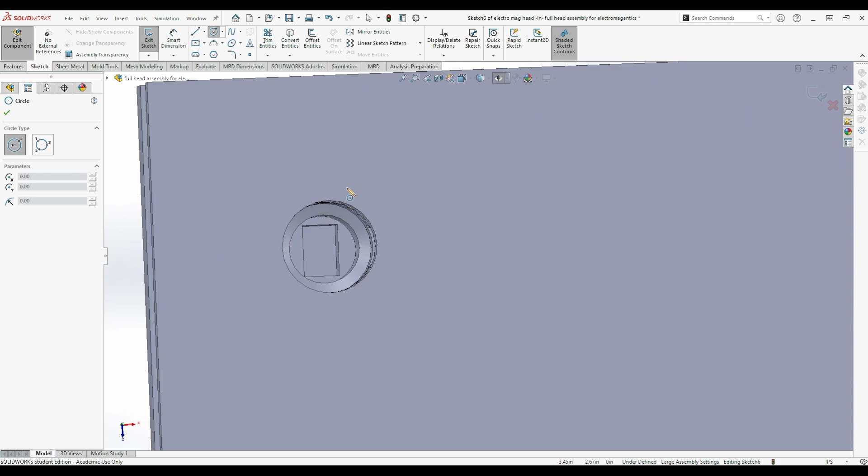So you're probably wondering, what in tarnation is this? Well, I'll tell you. This is possibly one of the coolest things I've designed so far. This is a 3D pin toy turned into a tool. This tool specifically is best for weighing things, modeling things, and also taking measurements.

So I'll give you a little backstory. First off, my video on Monday, I designed this. This is the main computer housing of this whole two-part series product, and so this contains all of the housing.

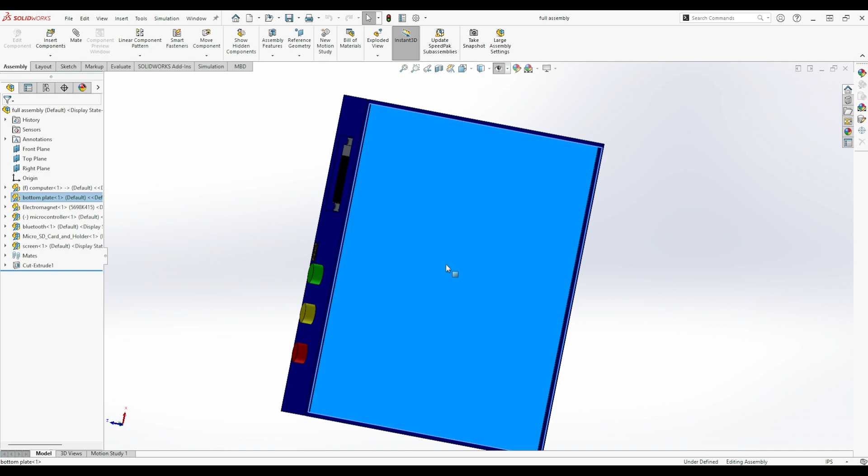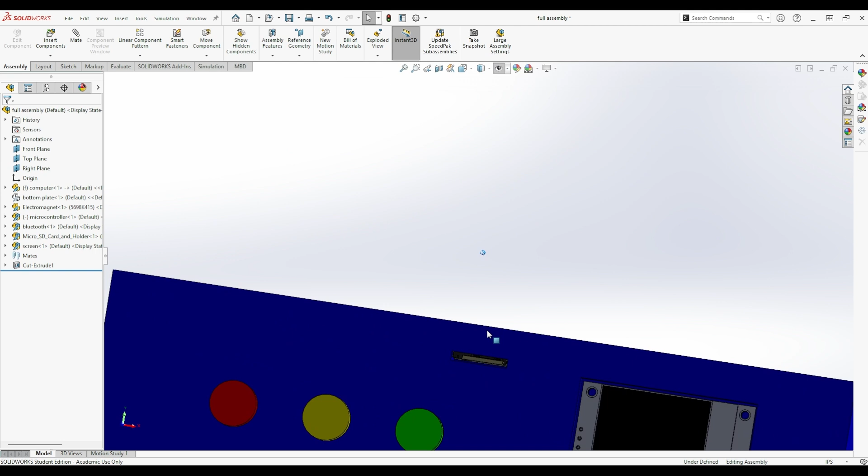So it has an electromagnet, it has this main microcontroller circuit thing that connects to computers. Here's Bluetooth, so you can download the app and connect to it. Here's a micro SD card, so you can add storage to it. Buttons for modes, resetting, and turning it on and off, and then a little screen to tell you the weight and all the extra little things you need to know. So that's what I modeled and showed on Monday.

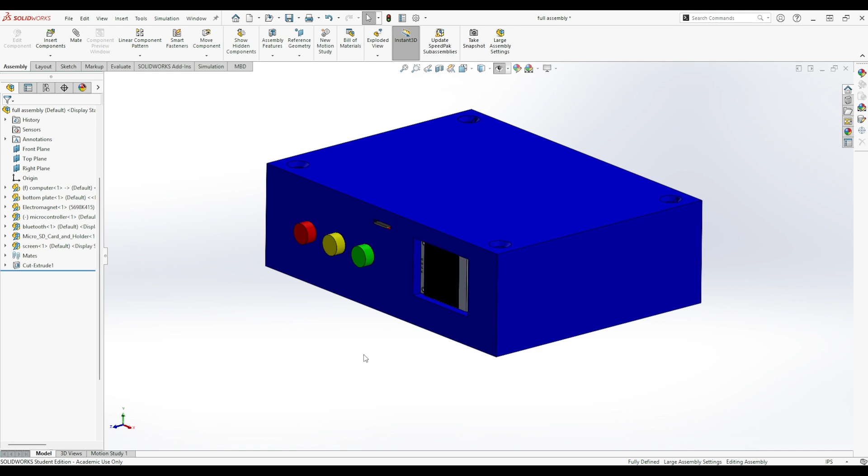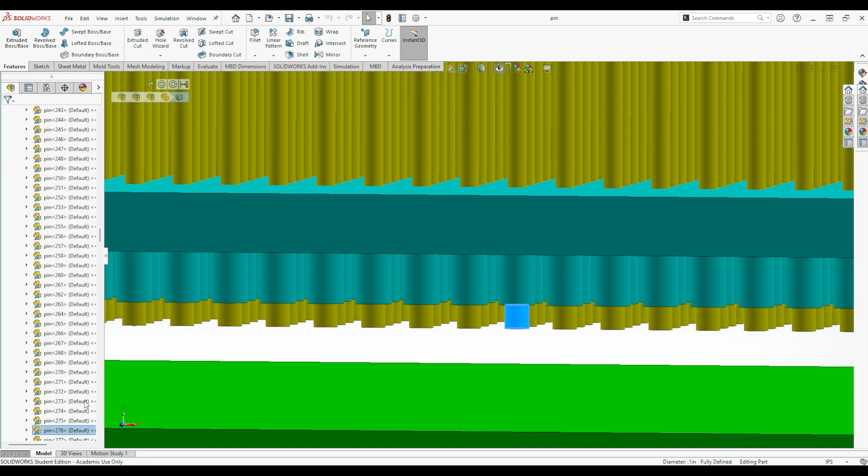And then this week I have two heads that go on top of this that are pretty sweet. So this one, all these pins - imagine with me, okay. These pins will actually open up, one of them. Yeah, if you couldn't tell, there's a lot of pins. If you see over here, there's about 759 pins in there, so that's why it takes a bit.

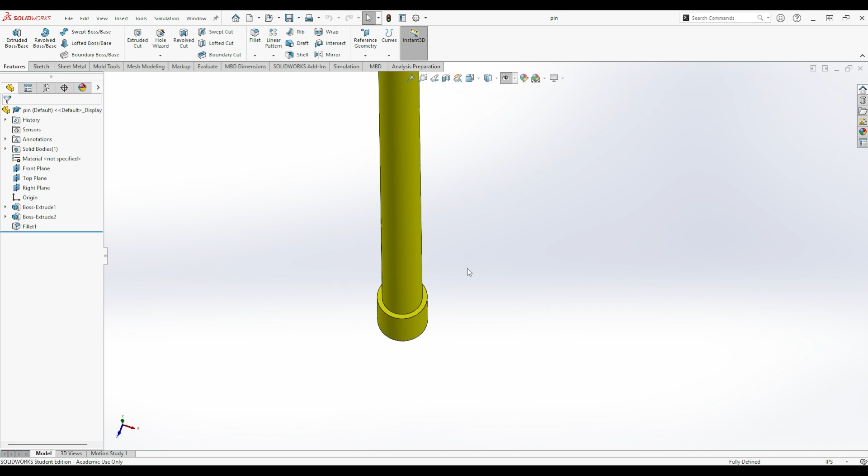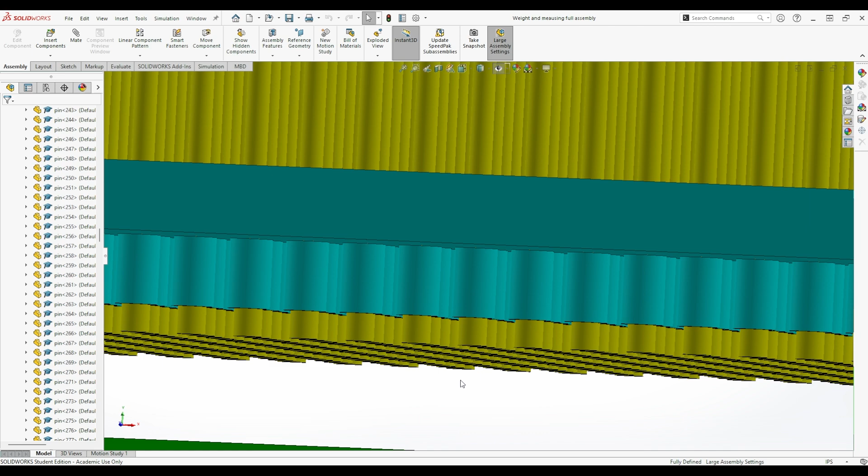So here's the pin, here's a little lip. I want this lip to have a little magnet slash circuit in it that would connect to the bottom of this. So these overlap so they can't go any higher. But since this detects weight and measurements, if these two work together, the farther these move down, the more you know how deep it is. So if you put something on it, it'd be able to tell the weight of how far it goes down and the distance.

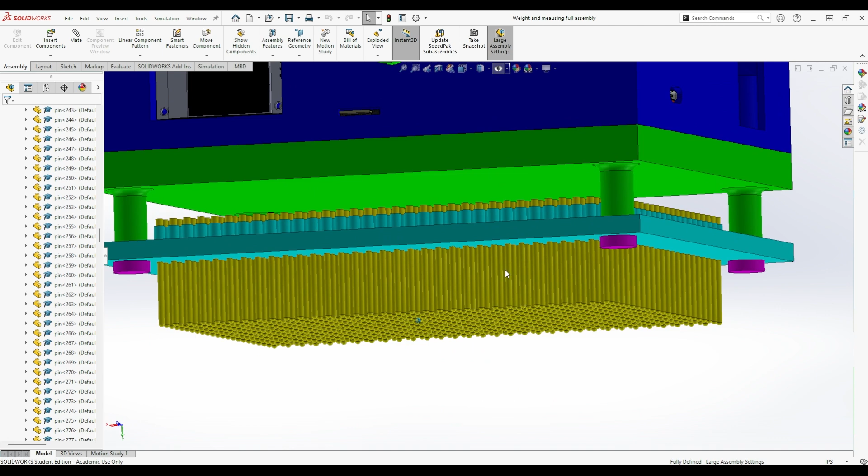The other problem I kind of found was like, if you're gonna measure something sitting it on top, it might not work as well. So you might have to flip it over and put it on it, which, since everything's locked in, should be okay. Which is kind of cool. But then you could put it on it and it will kind of move up, and that will help determine what it is.

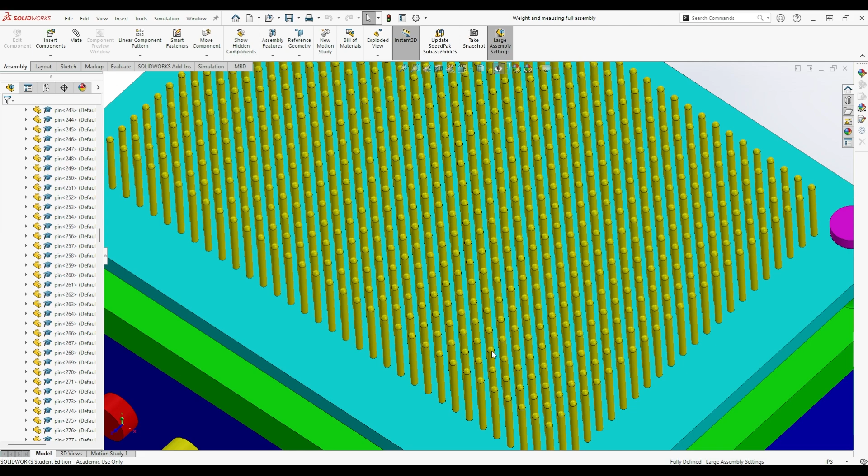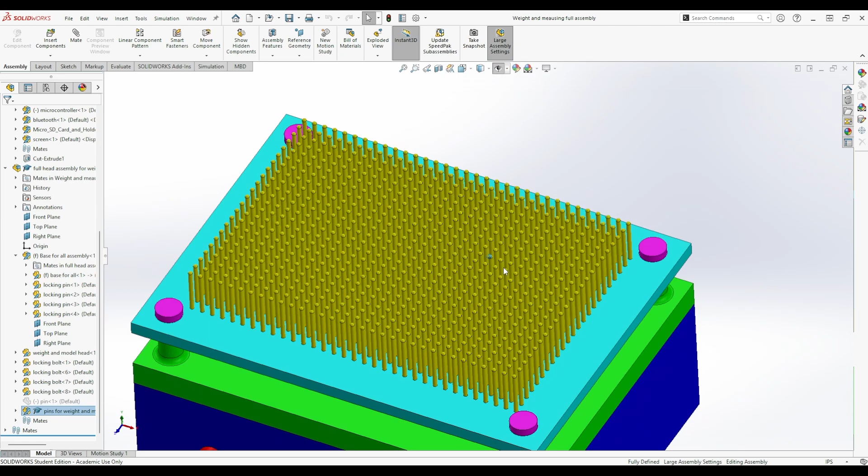And then the modeling part is, theoretically it would be a lot tinier pins and a lot more of them, because the more pins you have, the more you can tell how much is there, how much isn't there, and you can get the dimensions a little closer. For this, let's scroll down and see how many pins I got - 759 pins. I didn't want to model any more pins and figure that out, so we're stuck with 759. But you get past the number and you understand what's going on.

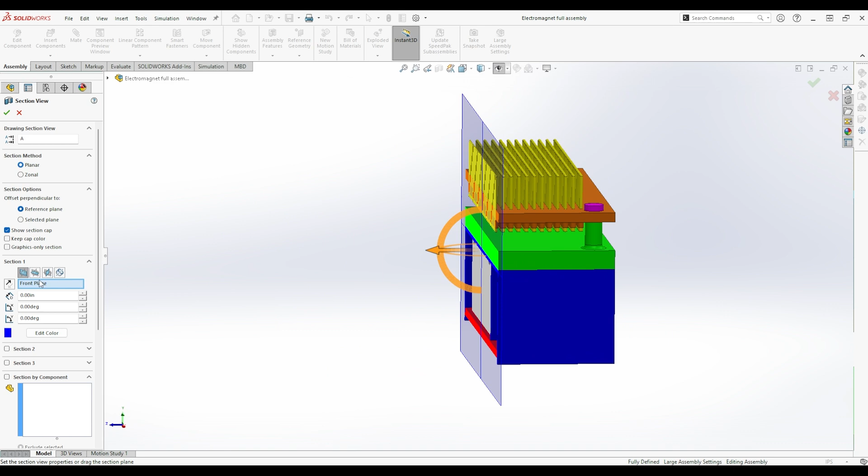And so there's two different types of heads. So this one's one, and then here is the other one. So, oh, nope, wrong one - here you go. So this is the electromagnet head. And so we'll actually go to this. Now if we take here, so you can see, sorry, it's in line with the electromagnet.

So as this is pushing up, you'd mainly hold it like this, and this would be to pin things down. So you can pin it down, turn on the electromagnet, and it would push those down, and it would hold it there, so it wouldn't move around.

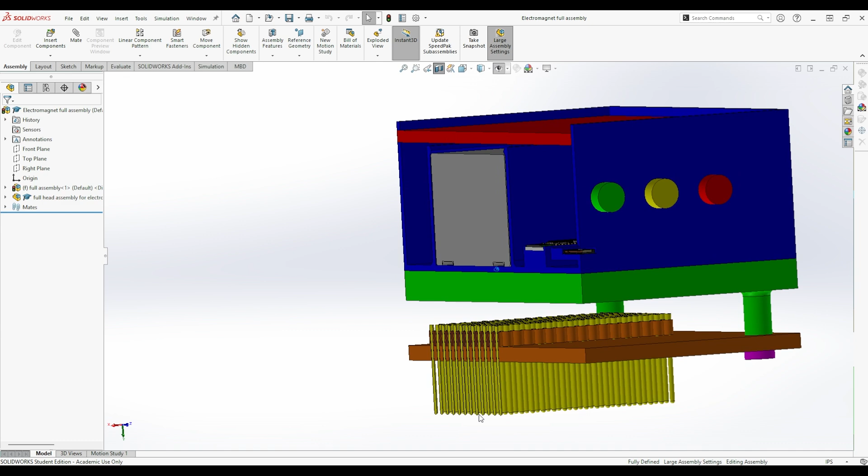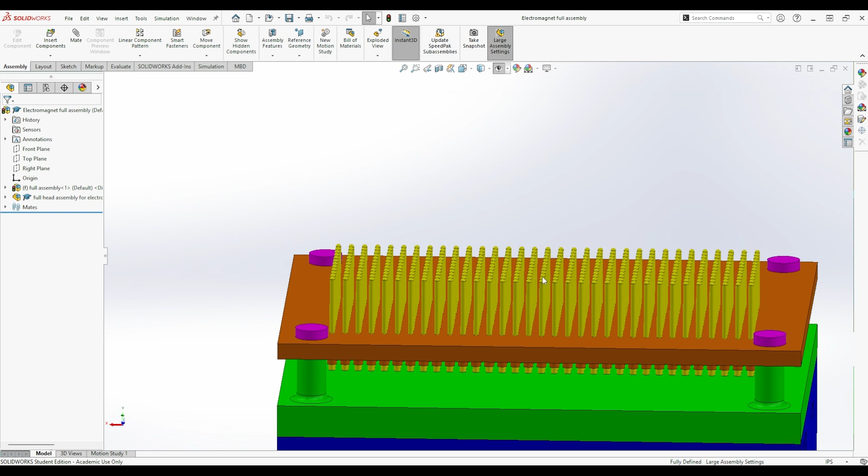Another way you can use it is if you sit something on top and you let it push it down, then you can kind of work with it, because some of it's going to be pushed down, some of it isn't. And then when you turn the electromagnet on, it will push these up, allowing you to push against it and then you get a better hold because these aren't going side to side - they're only going up and down. So you can use them as kind of like a wall to lean it against.

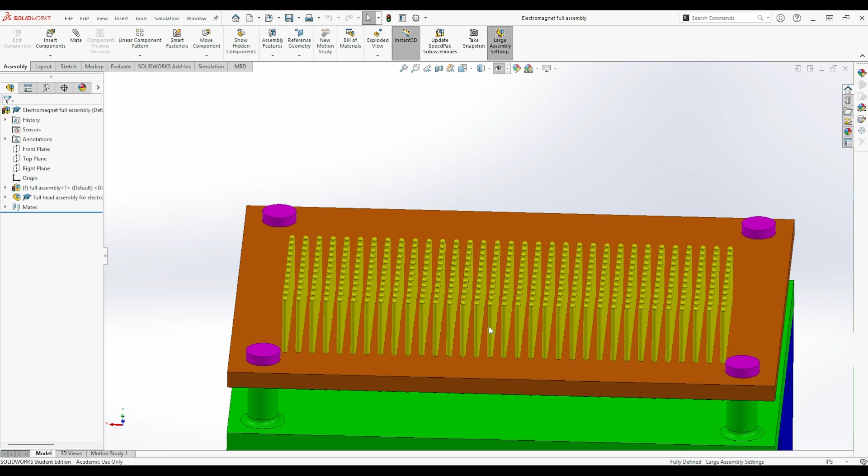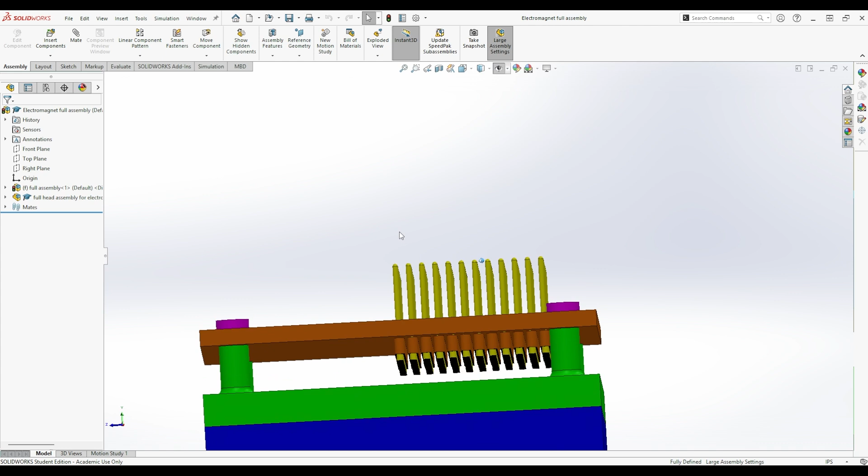And then it allows for if you're working on small parts, a smaller wall so it's not in your way, and you can mess with it. So if you need, you can go on this edge, put them in between, and then mess with it. So that's kind of the cool part about it. And so this one's only on the back because that's where the electromagnet is. Yes, the electromagnet could work along through this and push them up, but for the instance of showing, having it right in line straight up pushes all those up. So that's the best way to show it.

And then we have this base. Oh, my bad, so we'll go here and show this. And so this is the cool part.

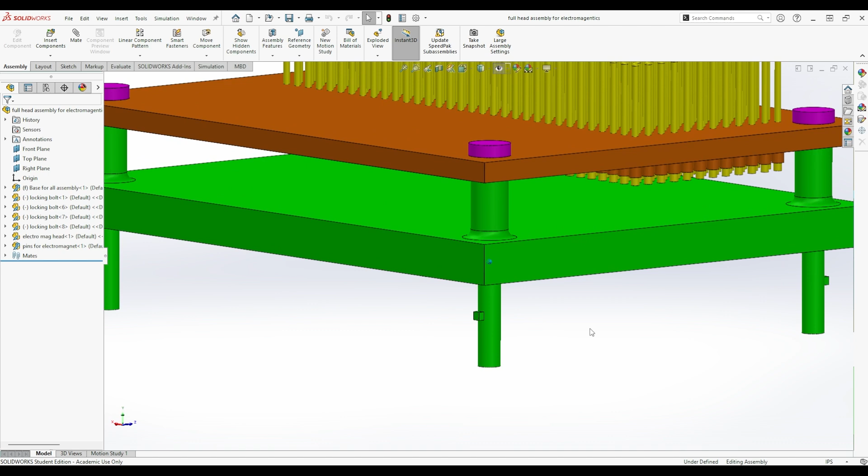Actually, we're going to go back. Screw it, we'll leave it. There's a fly in my room and it's really annoying me.

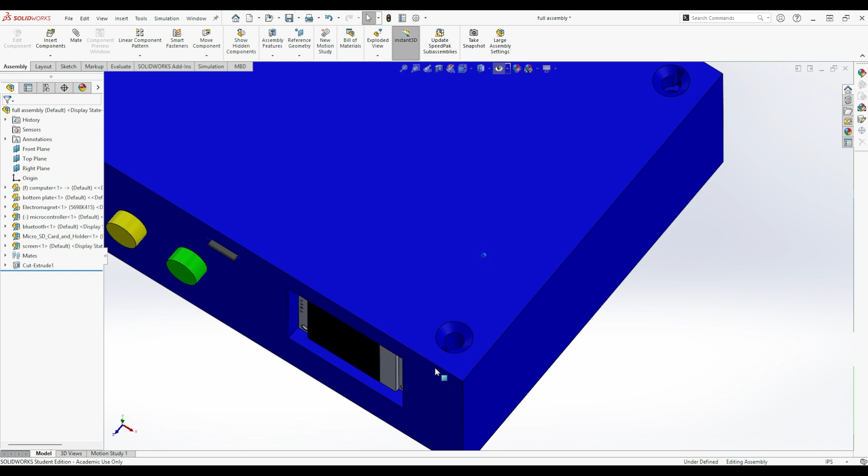So you see these little tabs right here. If you go back to this, it also has tabs. Those tabs go in and spin, and then they lock it, so now it doesn't go out. This is how the information gets from the pins to here, through this board, which is an electrical board that has the information you need that comes through here, goes into here, and goes down, and that's how the circuit and the computer knows what's going on.

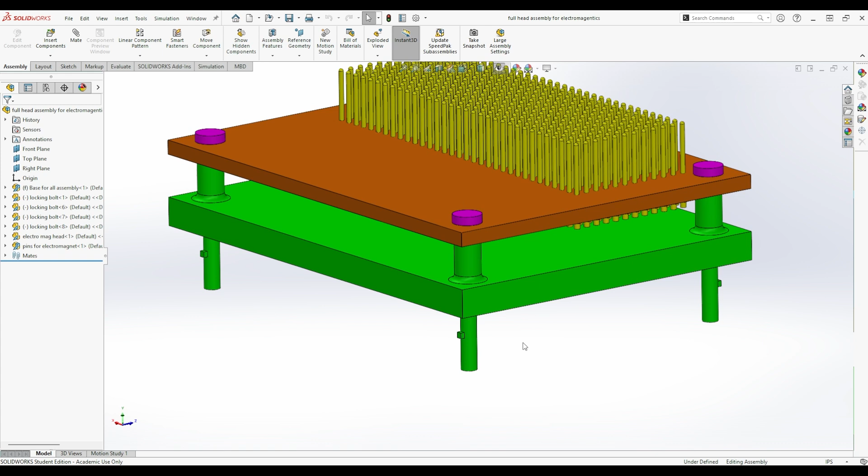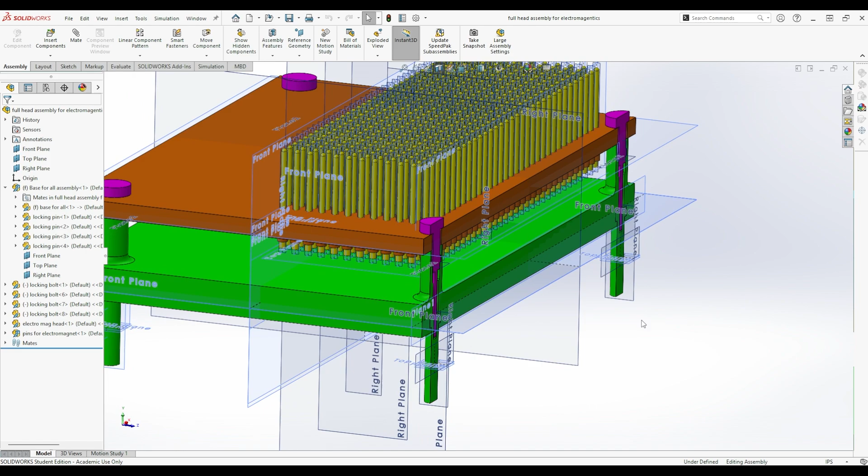Now the next cool part about this is we have to turn this on, turn that off. Where'd it go? Okay, we'll go here. And then here. Here. So what I did is kind of a genius move.

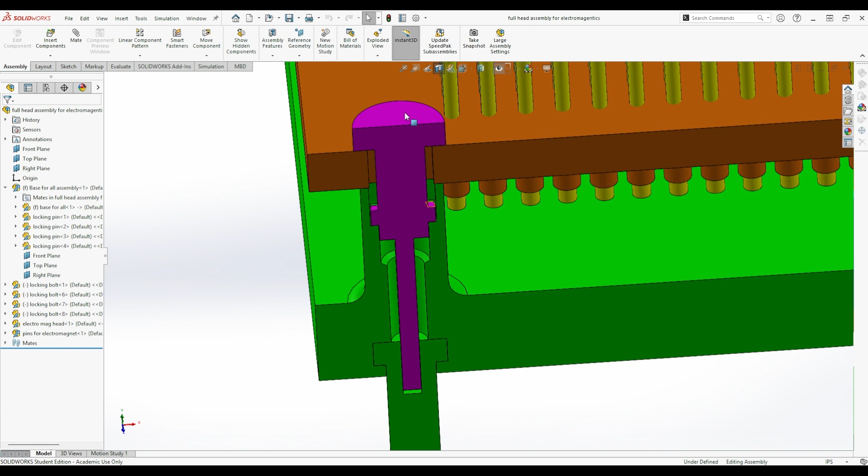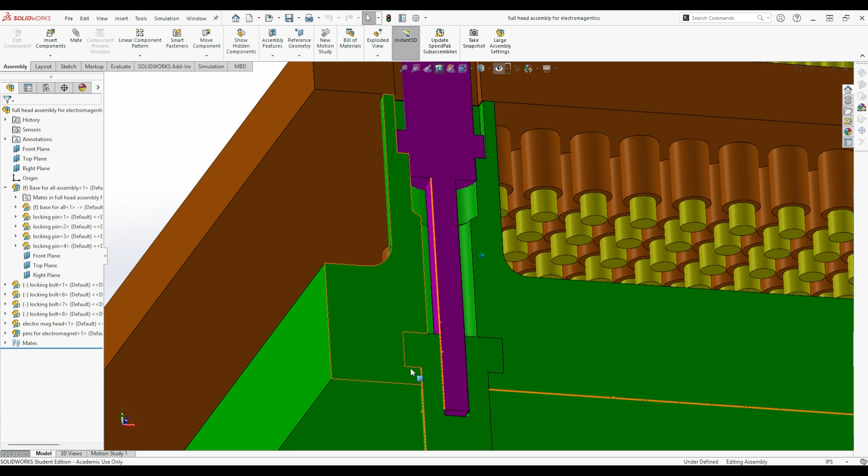So this pin would be made out of a metal of some sort, don't exactly know, but through this, the top plate is a little slider for the pin, and these pins go in and it allows you to slide it around. There's a little channel through there that you can slide and lock it in, but then also this pin has this other extension that goes down through, and this pin's inside the other base, and it slides into that where this pin is. So when you spin this top one, this spins as well, locking it all into place. So this panel locks into this base, and this base locks into the computer itself, all with one turn.

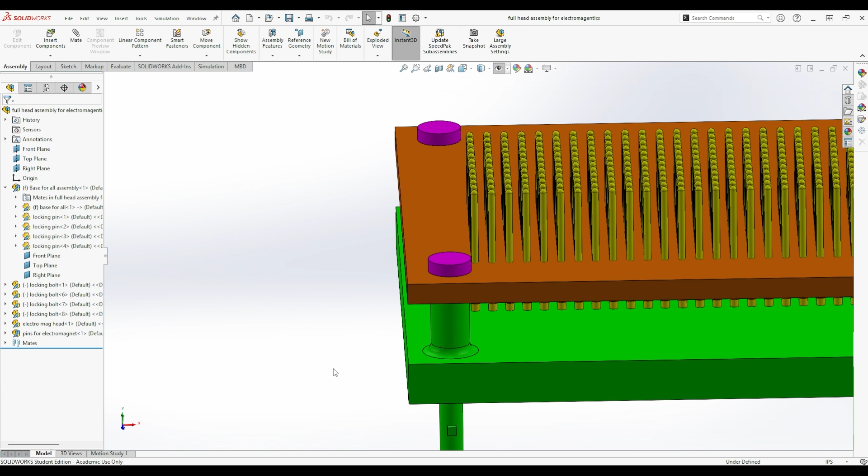Yes, I know it's not extremely strong, but you have 4 pins on it going different ways. These 2 are going one way, these 2 are going a different way. They don't need to be super tight because you still get the same results. This is where the money is. These are just to hold it into place, but also allow for easy changeability.

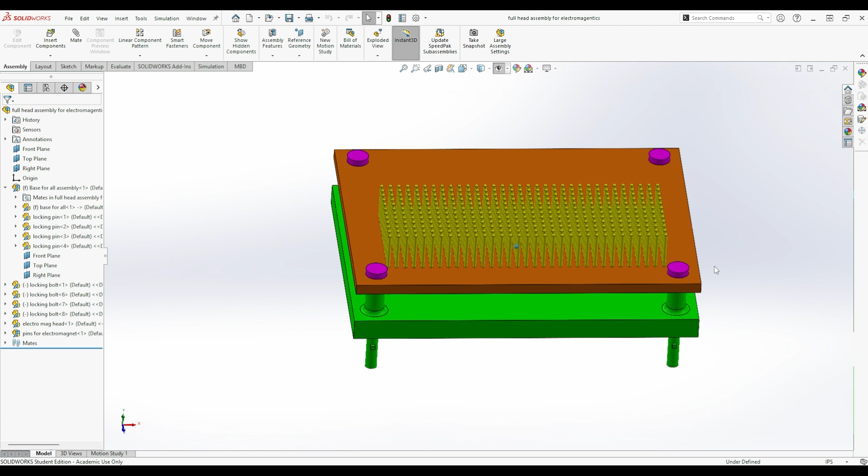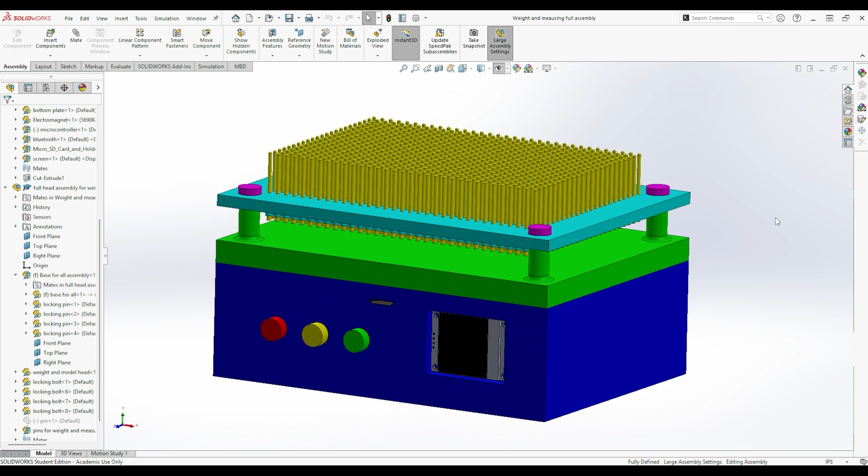So here's this, but just a different color, same base and everything like that. This is the next step, so this is what this product would look like. You could make it probably smaller, a lot shorter, but the main thing is you want these pins long enough where you can get a good measurement on it. If it's super tall, you might have to worry about it.

Again, this isn't specific, this isn't exact, but say you're measuring a spoon and you just want to know how deep that is and what the measurement is on that—you get a good gist, and then you get the model. Don't exactly know how that would come in, but you'd still be able to get some sort of model where you won't need a 3D scanner. You'd get enough, because if you put your hand in a pin toy, you get the general shape of your hand. You don't have to measure out each finger and everything. If you're given that, you work your way around and figure out the other parts of it. Or like a face—you get the general gist of the face.

Yes, you have to do other measurements and kind of get it better, but it saves you a thousand more seconds than if you're using a 3D scanner, and hopefully more money you'd save if you use this, because this is like an 18-in-1 type of toy—or no, tool, not toy. My bad.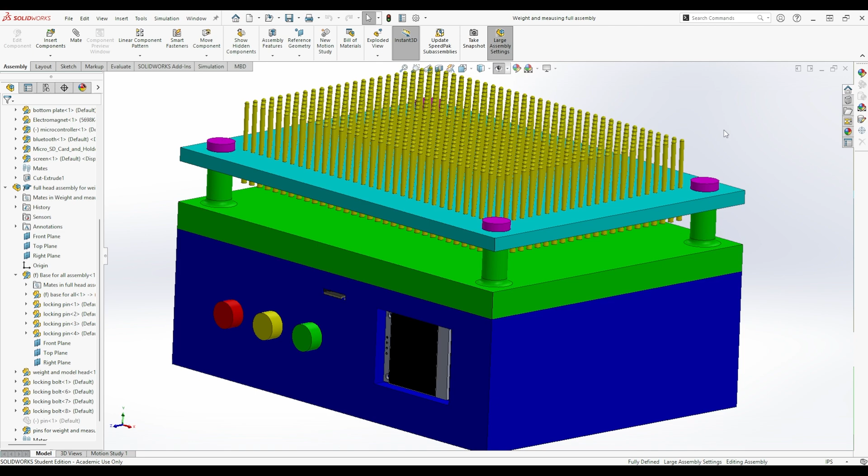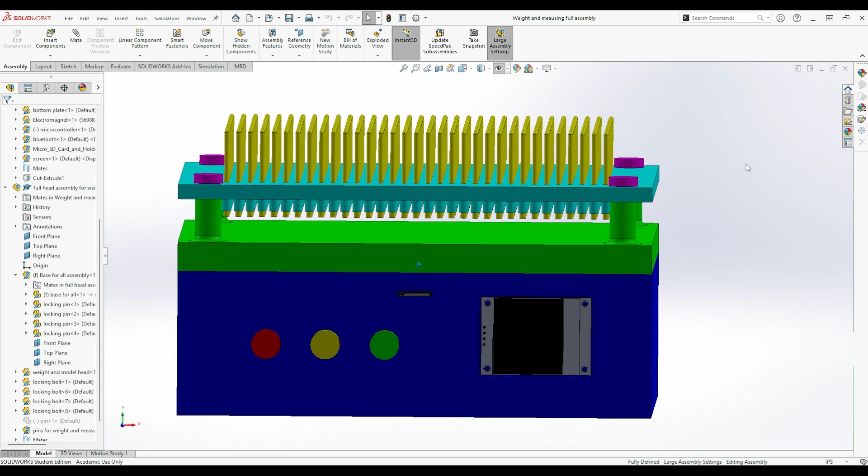So obviously as you go on, the heads, the attachments that you're using with the pins, can become more in depth, more specified to the different types of applications you're using it for. Because again, you could use this for tool and die—you'd get a general gist. There's so many things you can get this for that you wouldn't need a 3D scanner for.

Again, pros and cons of every single product, but for something that could be simply made—possibly, I don't know how simple, again this is futuristic, I've never seen anything like this—but it could work. It could be sweet. I believe it will work. Do you believe it will work? Let me know in the comments.